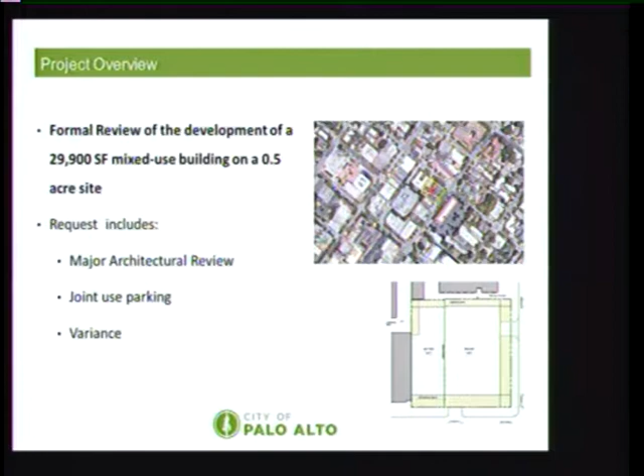The project did go before the board previously in April, just a few months ago. There were a number of items the board wanted the applicant to address and come back with. A lot of those had to do with privacy and daylight for interior spaces, relating to residences along Webster, as well as the interface with the unit and the Redwood Terrace space in the back, which is solely for the use of the office space, and some of the interior layouts on the upper levels for units 15 and 16.

They also wanted to see some bicycle parking added at grade where possible, review the overall height of the building in relation to some of the floor-to-ceiling heights, consider adding an accessible ramp at Webster Street, and finally review some of the lighting throughout the project.

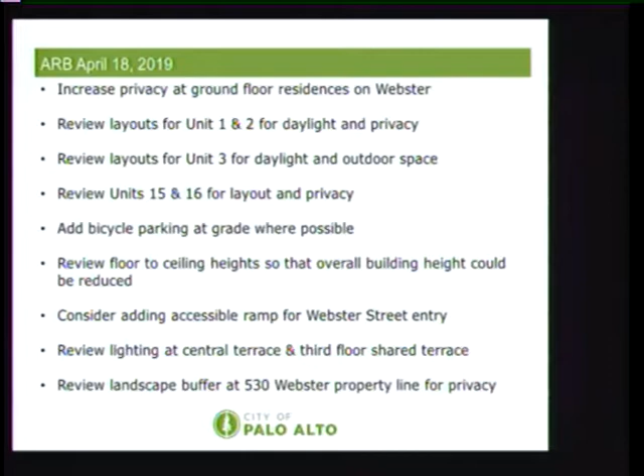The applicant has a pretty extensive presentation on how they addressed each of those issues, but in summary, we believe they've addressed those. There are a couple where, for instance with the height, there are some constraints the applicant has mentioned about the elevator, so maybe we can seek some comments about how to further address that, or maybe it's okay as is. In summary, the project is a 3-story mixed-use project.

There is an offset in the floor area ratio for efficiency of the project, since some of those utility and trash spaces are included more on the bigger, larger parcel with better access to Webster Street, versus trying to get access on Hamilton with a smaller parcel, which isn't really a good idea. So for a better project, there's some offset in the FAR on the site that way.

The project proposes rental units, so it would pay just the impact fee for affordable housing. The project includes a level of basement parking and a lot of those mechanical lift-type spaces, which are allowed by code. The code requires 60 spaces; the project provides 55, but with the project's joint use parking request and their accompanying transit demand management plan, we believe the reduction is okay.

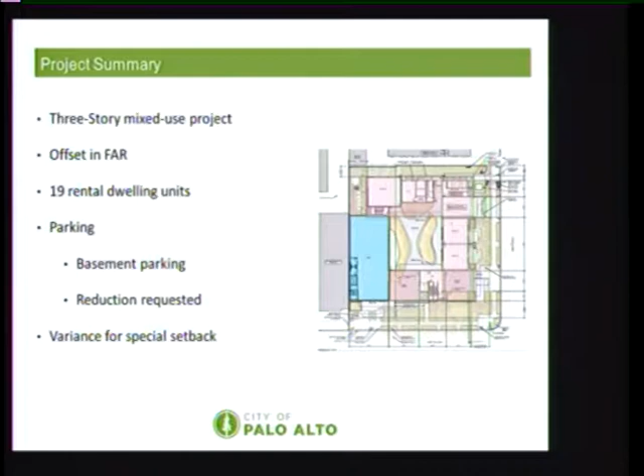This diagram shows the FAR distribution I mentioned previously, and those shaded areas are the utility and trash rooms, accommodating both the office and retail on that space, which makes sense given direct access to Webster. Otherwise, there's a courtyard in the middle of the project for open space, and as I mentioned, there's that terrace area in the back that preserves some on-site mature trees, solely for the use of the office space.

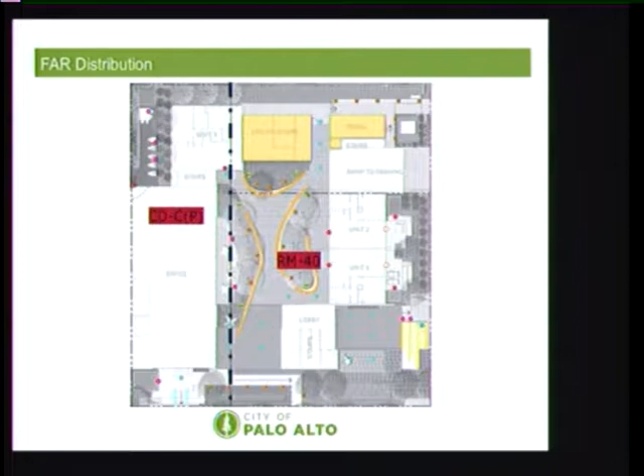There are a couple areas for the variance application. There's a 17-foot special setback along Hamilton, so any protrusion there would require a variance of some kind. In this case, we believe these are warranted—they're canopies, as well as a fin wall designed to be detachable if the city needs to use the space within that special setback area. The canopy, of course, is above ground. So we believe this variance is warranted, given the restrictions in the area.

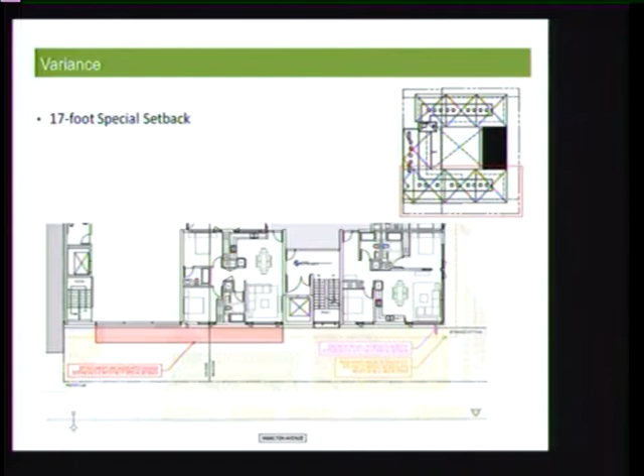And then this just provides a cross-section of the project and some of the floor plates that we were trying to describe. They are a bit generous, but I think the idea is to have a clean aesthetic for the roof line, as well as there's some limitations with the elevator that was chosen. It does have a low profile amongst other types of elevators, but again, the applicant can describe that.

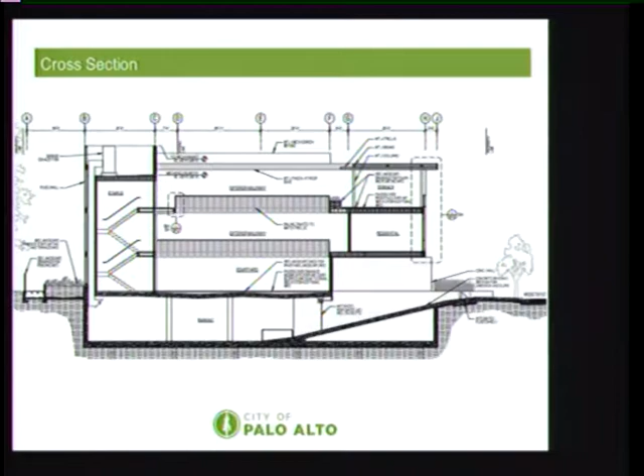And I'll show one rendering here. This is along Webster and the changes that were proposed. They did add a little more landscaping there to have more privacy. So the rendering above is the previous version that was shown in April, and then below is the new one.

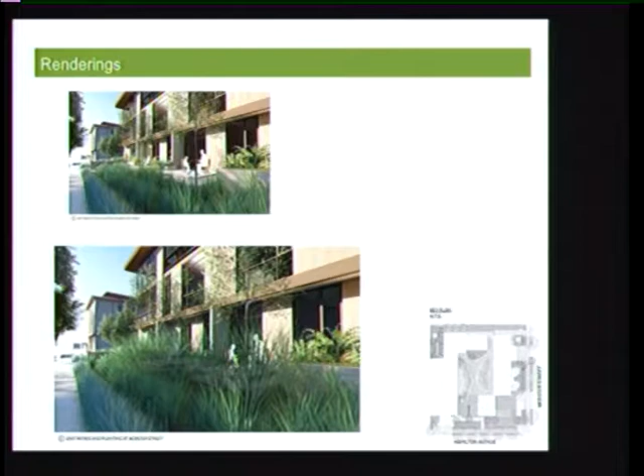So in conclusion, the project does respond to the ARB's comments, and the variance request is acceptable. These revisions proposed and implemented increase the consistency with the required findings. So with that, we do recommend approval of the proposed project to the director, based on the findings and subject to the conditions of approval. And that concludes my presentation.

The first item is the suggestion that we increase the privacy to the ground floor residences at Webster Street. And so we have looked at this carefully. The image that you see up here is different from the one in your package. It was very hard for us to actually render it. Within the rendering we had, it got very muddy in the background. So we thought it better to start fresh with an image that would show you more of what it would look like.

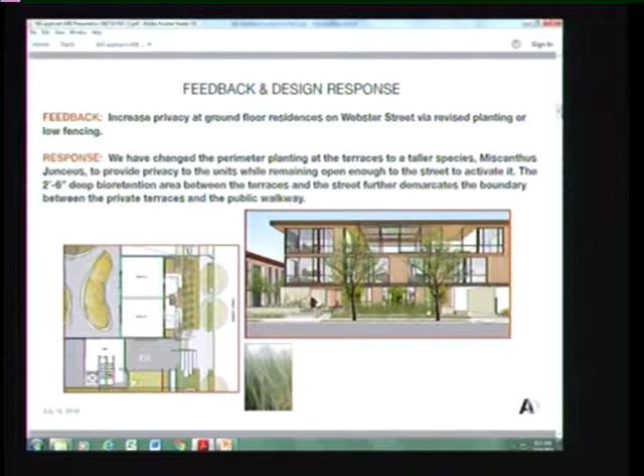And so what we're doing is we're proposing a revised planting, which would provide a greater height and privacy for those residences, while still providing an openness. As you might recall, we started this project a year or so ago, providing fences along those units to provide privacy. And at your suggestion, we pulled them away to really provide a more urban context. I think we went a little too far by making it too low in the last go-around. We feel like we've achieved a balance here that allows for the privacy for the unit as well as the openness that we would like to keep.

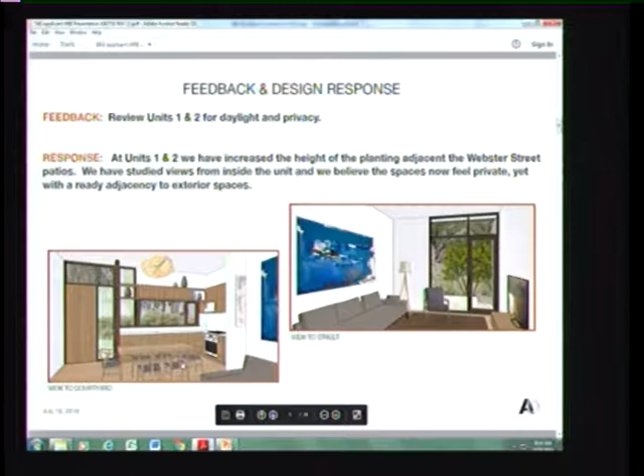One of your other items that you suggested we look at relates to this. So this is looking at those 2 units for the daylight and privacy from within the space. We have provided some images of what that looks like when you're looking from the living room out to that terrace area and then back to the courtyard. We recognize that there are very different people who look for very different things in the apartments they choose, and we think that these are apartments that would be very applicable for the urban dweller who wants a direct connection to the outside and more of a direct connection to the street. But that said, we have provided translucent glazing at the door as well as shades at the windows for privacy should that be desired, and that is typical in all the units.

For Unit 3, which is the corner unit by the Redwood Garden, we have also shown you here the atypical kitchen casework elevation. I think there was a comment on how the casework and the window might work together. So we've designed the casework to sit above the window at this location, which provides space for a shade pocket to provide a direct connection to the exterior. At this unit, the kitchen has a landscape buffer of 6 to 7 feet before the terrace starts. That landscape buffer provides a distance and some height of planting, and there's also 2 magnolia trees there to allow for a little more privacy for that unit.

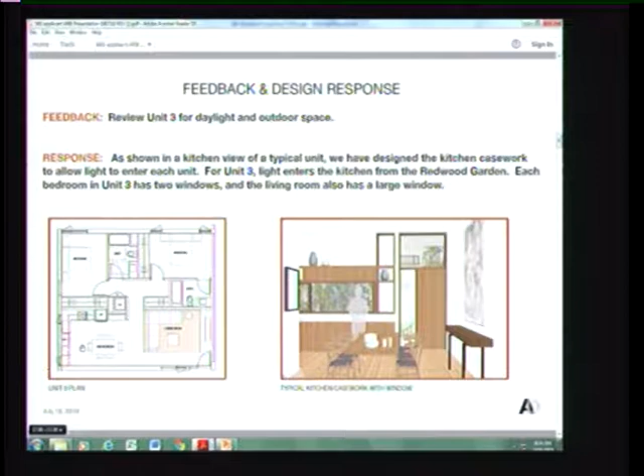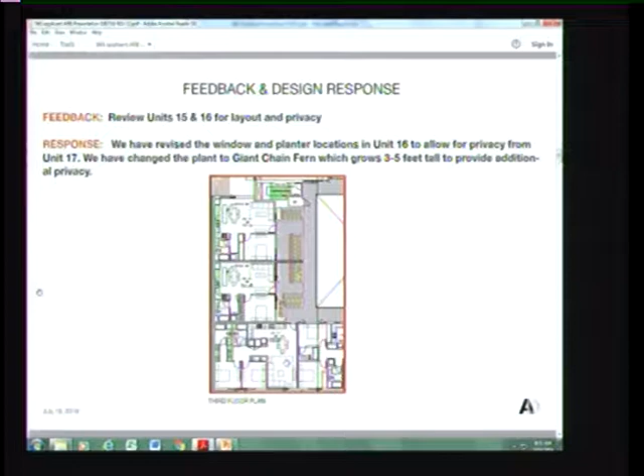For units 16 and 15, we thought it was really helpful to relook at this in terms of privacy. We have relocated the window for unit 16 and reoriented the planters to provide more privacy between unit 16 and 17. In addition, we've changed the landscape material to a giant chain fern, which will grow 3 to 5 feet to provide additional privacy between those terraces and the walkway.

We have taken your suggestion to add more bike parking at grade by adding 2 more spaces at the corner entry. This brings our bike parking count and short-term bike parking count up to 6 from 4, and 4 is our required minimum.

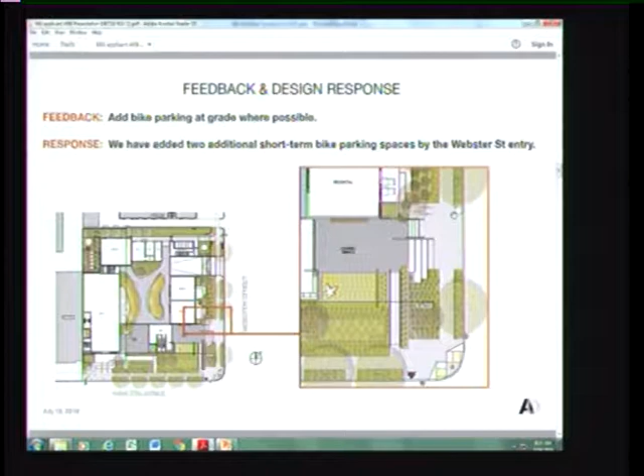I'd like to spend a little more time on this one, so I'm trying to rush through some of the others, because looking at the height was something that we did very carefully, and it's a bit of a complicated issue.

We're happy to give you a couple more minutes if you need it, to make it clear to us what you're doing. All right, I'll slow down.

There are a couple of driving factors in setting the building height at 40 feet. The first is that our first floor is set by being 1 foot above the base flood elevation. We then have 2 elevators within the building, each with their overruns, and that sets the height of the 3rd floor, with the 3rd floor being the residential unit, and the 2nd floor where the office elevator comes up.

What we're specifying is a Schindler elevator, which has a 12 foot 7 inch overrun, the lowest we've been able to find. Most are in the 13.2 to 14.5 foot height range. Even with these, we're not bringing our typical floor plate over. We're having a very special acoustical separation at that location, where we have a residential unit.

At our roof, we're popping up just a little bit, but still where you're not able to see it from the street. The last floor, basically in this sandwich, is our first floor, which right now has a clear space of 10 feet 4 inches in the office, before the mechanical ductwork.

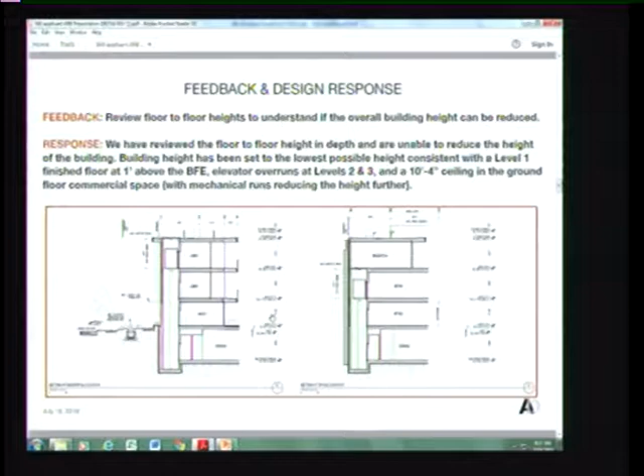We've also taken a step back and looked at the project. We haven't looked at these images for a while. They're in your package, but they haven't been part of your presentation. Just to look at this building in the context of its neighbors.

It is truly, as Sheldon has said, a transition building. It transitions from these taller buildings. All of its neighbors are taller than it. Obviously the church is 70 feet, but our adjacent neighbors and then the neighbor across Hamilton are taller too, and then we have our lower residential neighbors.

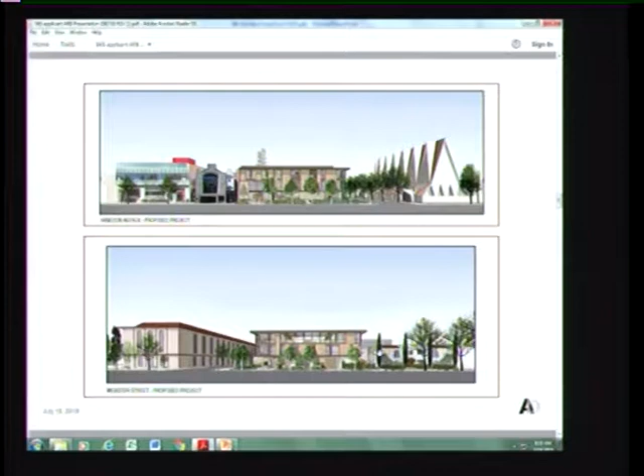We're addressing that by opening the building at the top floor, creating a glazed corner, and bringing that third floor line to align with the roof line of that building. So we feel that the building, with its 40-foot height, still really deals with the transition at this corner.

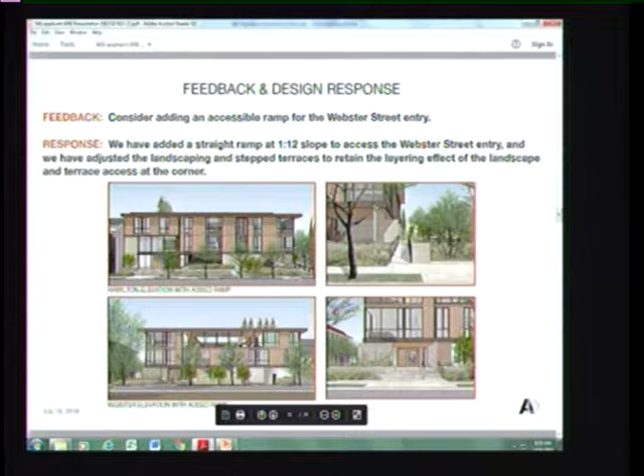You had suggested that we look at adding an accessible ramp to the Webster Street entry, and we think this is a very good suggestion. We have added this in as a straight ramp, a 1 in 12 ramp, by adding another planter and layering it in, so we still have the cascading steps that come to that corner. We think this is an improvement to this corner for many reasons, accessibility being the primary one.

Here you asked us to look at the central terrace and the light levels. We think this space is going to be quite nice. It's 30 feet by 32 feet, and we have two analogous spaces that we'd like to show you.

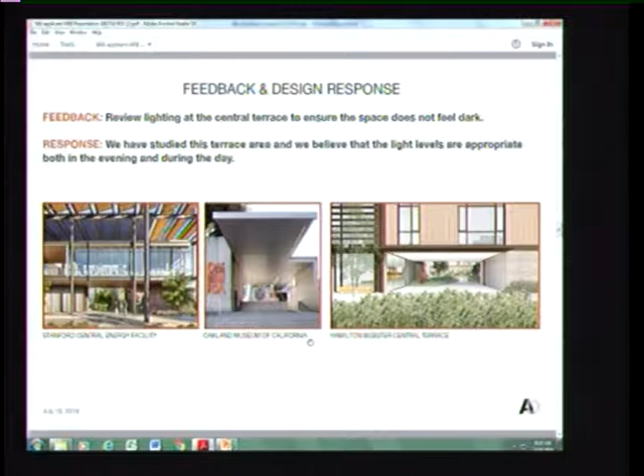Here is the Stanford Central Energy Facility, and that space is scaled very similarly. You see the courtyard through the center of the space. Then the Oakland Museum at its front entry canopy, which is much longer, but daylight appears along the side and then in the back in a similar proportion for the space here. I think both show that the space can feel light and not dark.

At the third floor, we looked at the lighting and thought that was actually very helpful. We went back and found a new fixture, and this fixture has brought down the lighting level significantly, but it still provides an even level. We haven't changed the number of fixtures, so the lighting level is even.

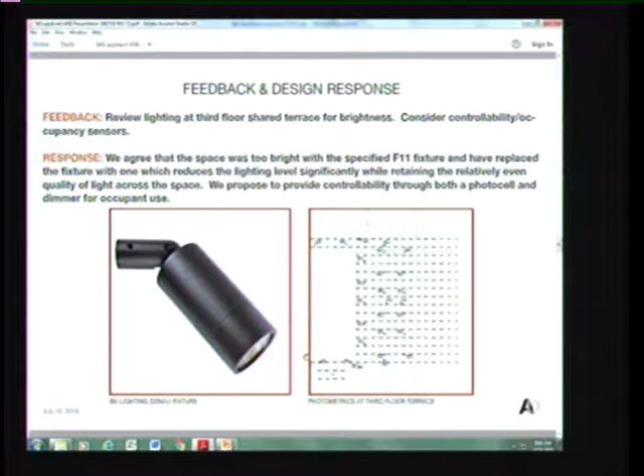In looking at controllability, we're proposing to provide that through both a photo cell and the ability to have a dimmer for occupant use. The intention is to keep it low, and if an occupant needs to use it higher, it would be set higher. We were concerned about the on-off occupancy sensor and the kind of flickering through time.

We have also looked at the landscape buffer to our north, and after meeting with our neighbor, we've added 2 additional trees along this boundary property. We have a utility line running into our utility space here, so we're unable to add more trees along this area. But the coffeeberry shrub proposed here can grow up to 15 feet.

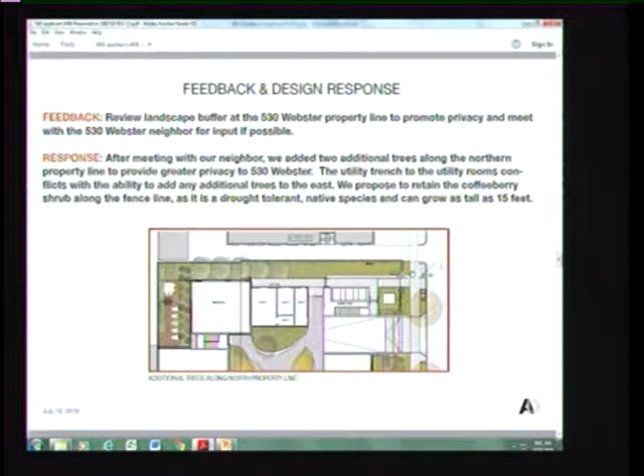There are a couple of planning requested changes, as Sheldon has mentioned. We now have updated things to show how we meet the new ordinance between lowering the stall count from 67 to 60, and then increasing the open area.

The increase for the RM40 parcels increased from 1,300 to 1,950 square feet. But it's important to note that we have 2.5 times that amount for this project, so we're well within that.

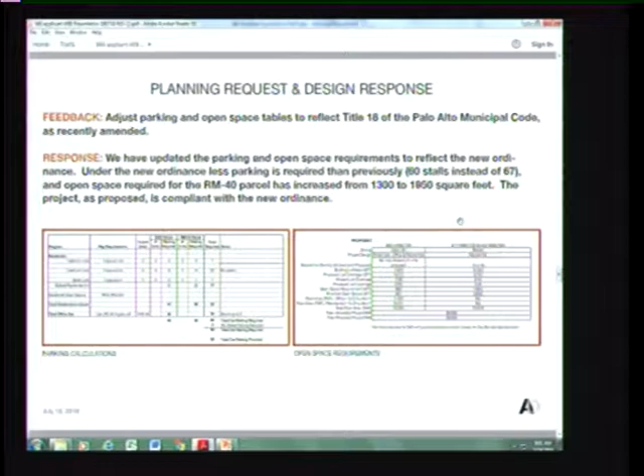And then lastly, we have pulled the building back a foot from the property line. Originally, the building itself sat at the property line, with window projections and eaves moving into that to provide depth for the building. So we've worked with planning. We feel like that depth is really important to the facade.

So we have taken a foot out of the courtyard and a couple of inches out of the units to pull the building back and allow those windows to no longer be in the setback.

We have also worked very closely with planning to allow the fin to extend, but it basically has separate rebar cages and can be cut off if needed in the future and still be structurally sound. So the remaining images are just the elevations.

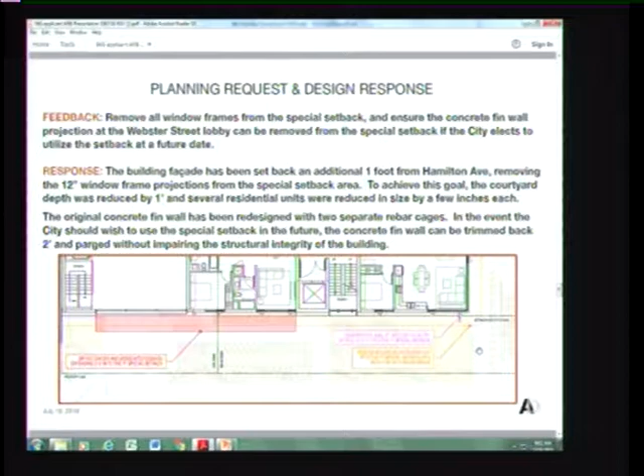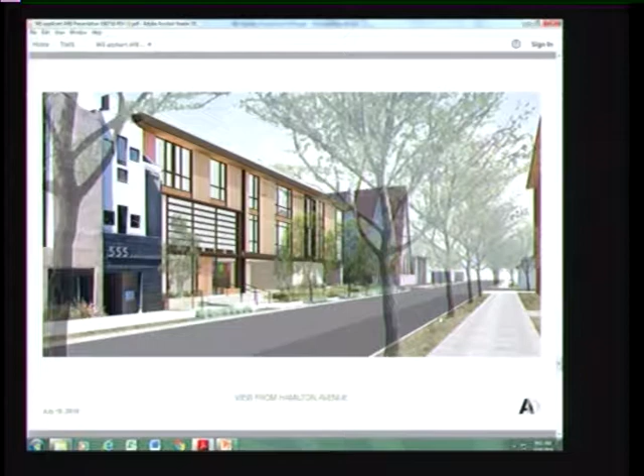And with that, we look forward to hearing your comments.

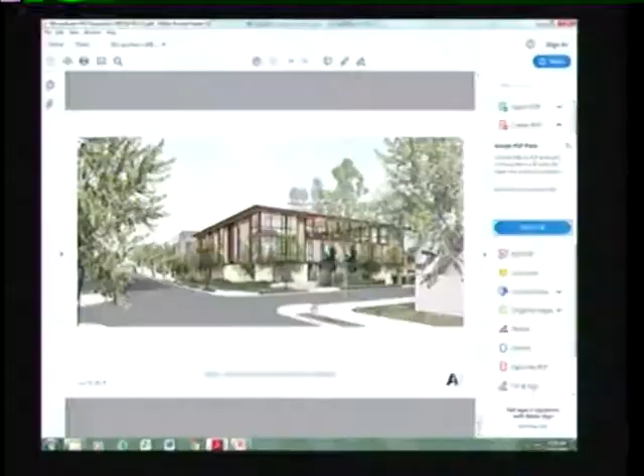Well, hold on a second. If you look at this image here and look at the right-hand side of the building compared to 530 Webster—this one? Yeah, Alex is holding up the actual architect's rendering from the corner of 530 Webster. But if you also look at this one that's on the screen now, very small, you can see 530 Webster in the background, and I think you can see that this building is substantially larger than 530 Webster. Visually, it really seems to overpower that building. And that building in particular, to me, has a real sense of presence on the street, a real character to it. And I think the building next to it is just a little bit too big.

And then when I hear the reason it's a little bit too big, it's really to do with the technical thing about elevators. It strikes me that it is possible to configure it so the elevator overrun goes through the roof and you have a bump out somehow. I would rather see a small bump out on the roof with the roof plate being lower than I would see the entire building be substantially taller.

So to me, it seems that the building should come down maybe a foot on each of the two residential floors, and we can ask the architect to revise the way the elevator overrun on the roof works through the roof. Then on the third floor, you have to find a way for your residential unit to accommodate that overrun somehow, if you can't find a different elevator. But to me, the building is just too tall vis-a-vis its relation to 530 Webster, and that is very much our province to solve.

So I'd like to see us request that building get pushed down. I think we can still recommend approval with that condition.

I can support the variance findings. I think it makes good sense, and the design itself is wonderful, I think. Thank you.

Thank you. So thank you to the applicant for an interesting, attractive project and for really clear documentation, which has perhaps made us more focused in our critique than we might be with less clear work. It's both been an advantage and disadvantage for you, but we think it's an advantage because we think the truth will set us free eventually.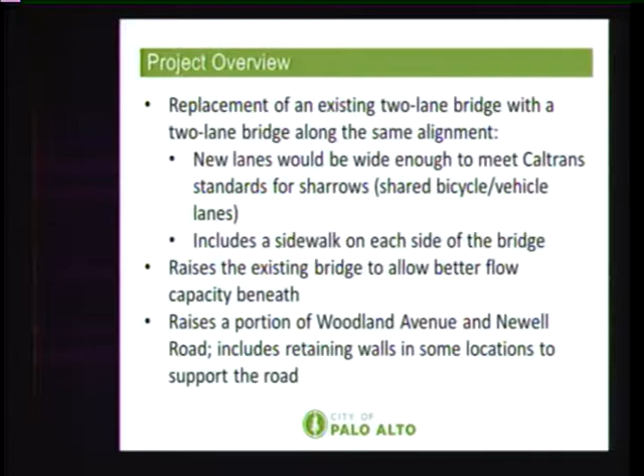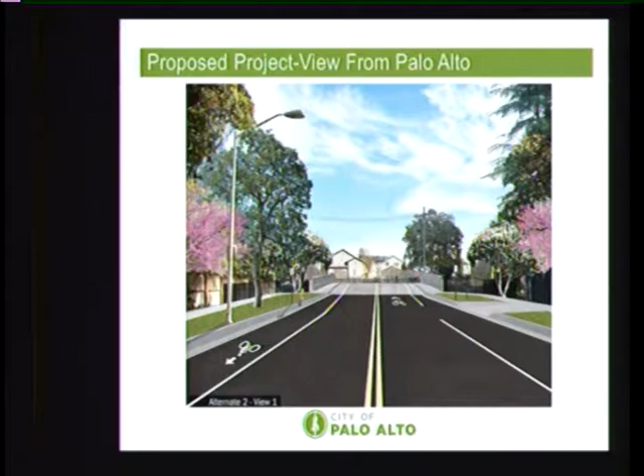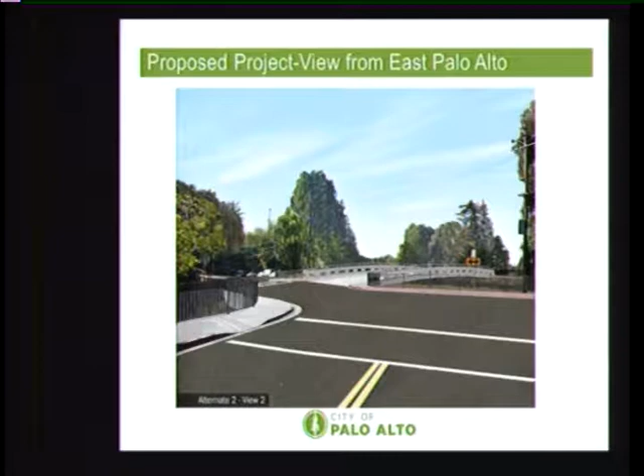So this is just a quick view of Newell Road, of the bridge from Newell Road in Palo Alto. And this is a view of the proposed bridge from East Palo Alto on Newell Road, again looking over Woodland Avenue.

Part of the purpose of this meeting is to provide another opportunity for public comment on this project. The circulation period for the draft EIR/EA is ongoing right now and ends on July 30th. This is the 4th and final public hearing during that review period. But we're also here to request that the ARB provide comments on the design of the proposed project. So any thoughts you guys have on the bridge, the railings, the retaining walls, the landscaping in particular would be very helpful.

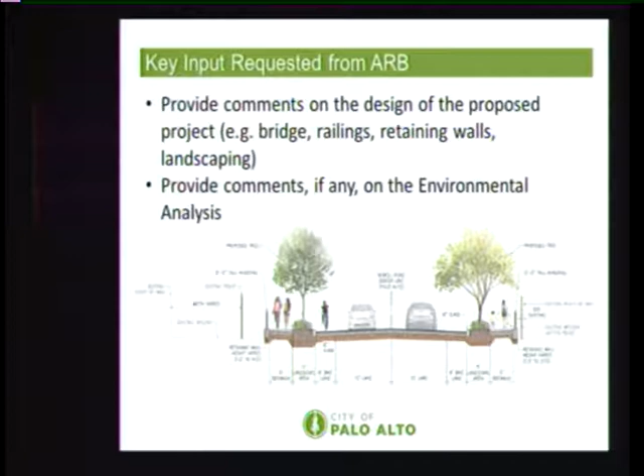And then any comments you may have on the draft EIR/EA are also welcome. And I also want to note that to the extent that you have comments relating to the NEPA component of the project, Caltrans is here today to answer any questions as the lead agency for NEPA.

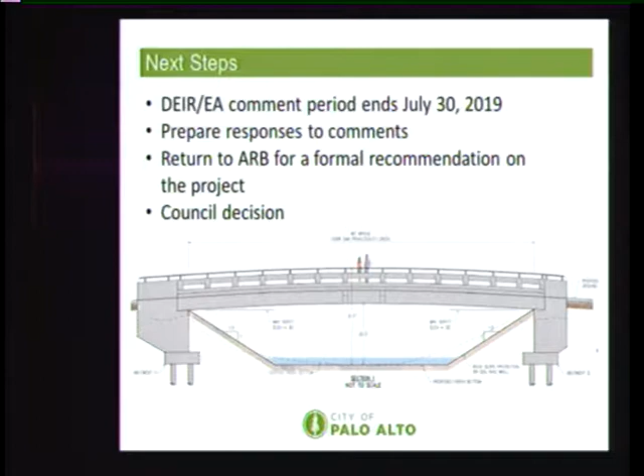So in terms of next steps, the draft EIR/EA comment period ends on July 30th, and then we'll prepare responses to all of those comments, and we'll be returning to the ARB for a formal recommendation on the project, and then going to council for a council decision. And with that, I will turn it back to you and recommend that you hear from Public Works.

Thank you, I had one question. So the other responsible agencies in this case are? There are several other responsible agencies. City of East Palo Alto is a responsible agency. Santa Clara Valley Water District is a responsible agency. Regional Water Quality Control Board would be a responsible agency. So there are a number of different responsible agencies.

So this is like landing on an aircraft carrier. Okay, yeah, there are quite a few permits.

And you said this is the fourth public hearing. What have the other hearings on the environmental review been before? There was a Planning and Transportation Commission hearing on, let's see, what date was it? June 12th. And then we had a community informational meeting on June 18th. And what was the next one?

Sorry, hi, Michel Jeremias, City of Palo Alto, Department of Public Works. I'm a senior engineer working on this project. The third meeting was scheduled for June 19th, and it was a Public Works Transportation Commission meeting in East Palo Alto. We also gave a brief presentation at the Joint Powers Authority, San Francisquito Creek Joint Powers Authority Board, and we've had a separate community meeting for the City Council of East Palo Alto that was done earlier in the week on July 16th. Thank you.

So first to my fellow board members, has everybody seen the site? Yes? Yes, I have not, no, but I looked at it digitally. Everybody but Board Member Thompson's been able to be there in person. And does anybody have any conversations they wish to disclose before we hear from this?

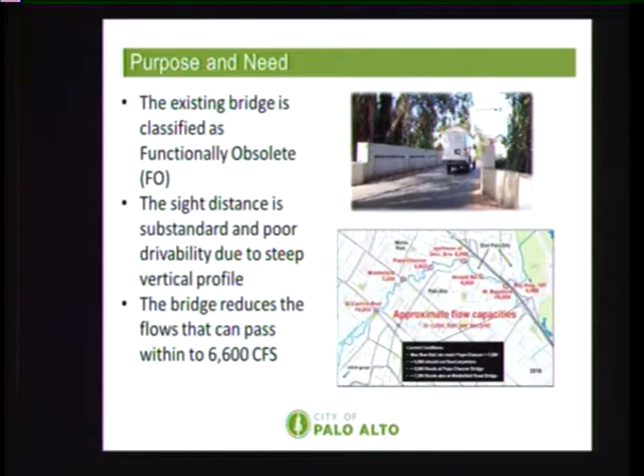So there's an urgent need to replace this project so that we can proceed with the upstream project, and it would benefit the community by reducing the flooding risk that affects our neighborhoods.

Project objectives. So as we have described our need, we also tried to identify what the objectives are and how we identify which options to consider for the EIR. Several items were considered. The first was vehicles maintaining a connection between both jurisdictions, allowing not only vehicles to pass through but creating sidewalks and providing for multimodal use. In line with that, we looked into not increasing traffic in either direction, and not increasing speeds. So those are items that were considered.

The project before you takes into account that it should not increase speeds or traffic, or divert traffic to other intersections. We've also looked at increasing the capacity of this bridge to something in line with the upstream project, and also based on the largest storm of record, which is the 1998 storm. So we're proposing to bring this up to about 7,500 CFS.

That's the capacity of the creek as well. So if you eliminate any constraints in the creek, that is how much flow could get carried through this creek from upstream all the way out to the bay. Recent improvements downstream have also allowed us to increase these capacities. As you're aware, there's a project that took place to widen the levees.

With these purposes and needs, and the objectives, we were able to narrow down—following several community meetings that have occurred over the last 7 years—to identify 5 alternatives. The fifth alternative, not shown here, is to leave the bridge in place. But the alternatives that were considered, in my next slides, I will show you a depiction of what these entail.

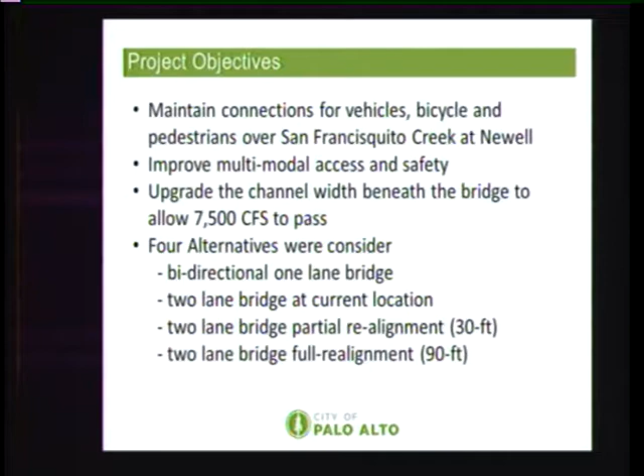Alternative 1, a little more detail for you to look at. This depiction shows what alternative 1 would include. Alternative 1 is a bidirectional bridge, only 16 feet wide. It provides 5-foot wide sidewalks that would accommodate multimodal use for pedestrians. But in order to accommodate 16-foot traffic in 2 directions, we need to install traffic signals.

There would be long-term operation and maintenance costs associated with this alternative for the fiber and power needed to run the traffic signals. The area of disturbance, for purposes of comparison, is 45,000 square feet.

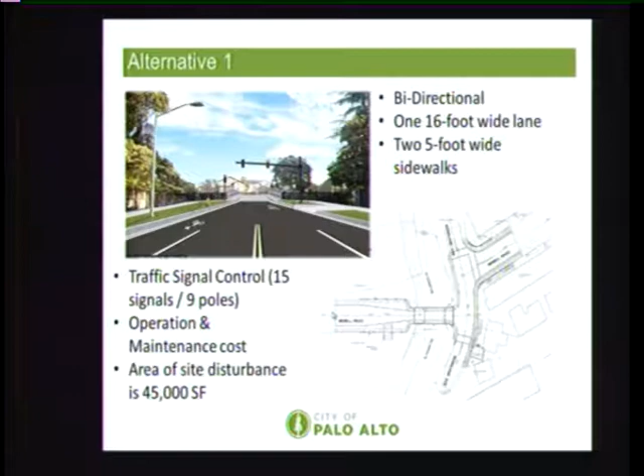In this alternative, I want to note that the bike lane would terminate at the end of the driveway approach. We would then stripe, within those 14-foot wide lanes, a shoulder line 4 feet off from the curb, creating a 10-foot travel lane. The shoulder line would act as a bike lane.

We've had a number of comments through the ongoing meetings regarding adding measures, so this is a bit of a change. We've added more information on these slides to show that the travel lanes in both directions are still maintained as 14 feet wide, but 4 feet of those would be shoulders that could be used for cyclists.

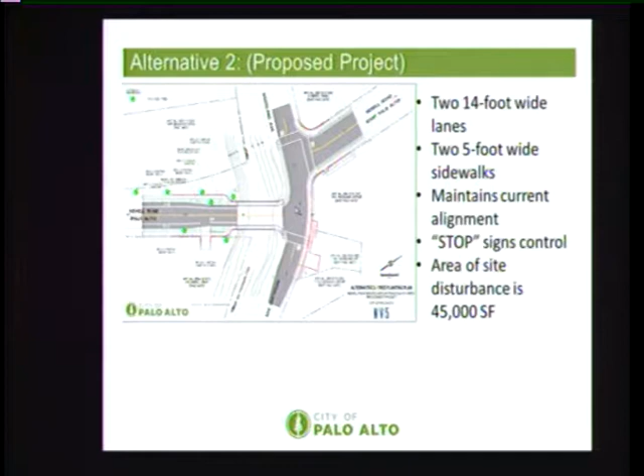Another thing to note, as Claire stated, we are raising this bridge by 1.5 feet, which also requires raising the approaches on both sides, on the Palo Alto side and the East Palo Alto side, by a total of 4 feet. That would reduce the vertical profile that currently creates a problem for people driving over the bridge.

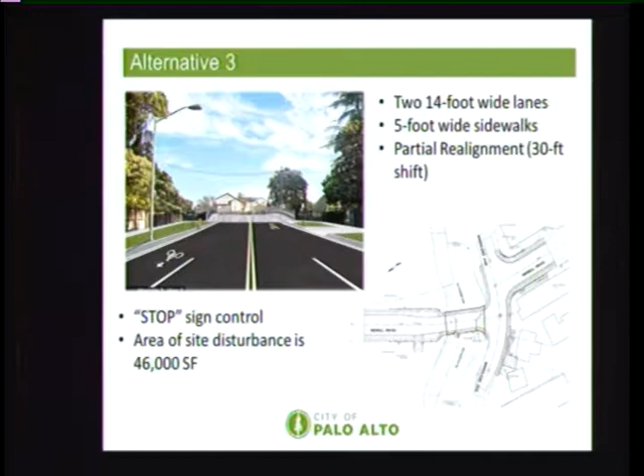Alternative 4 is a full realignment. Similar to the previous alternatives, we're looking at 2 14-foot wide lanes, 2 5-foot wide sidewalks with a full realignment. The area of disturbance is higher, 55,000 square feet. As part of the EIR, it analyzed things we would have to mitigate at a later date.

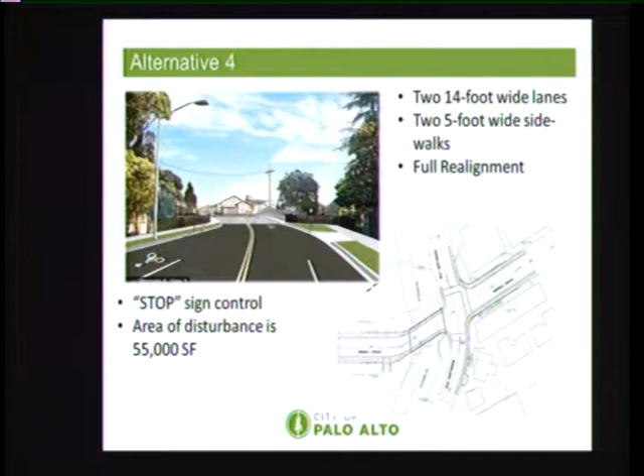Several trees to be removed as part of this alignment would also be located on the East Palo Alto side.

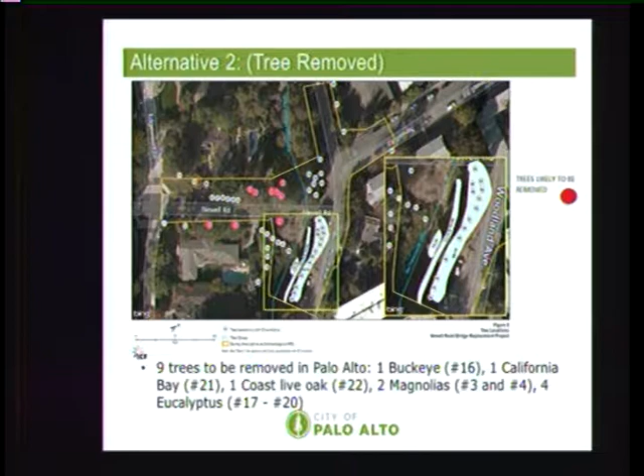For the proposed project, we've made a few changes over the course of our presentations. We have an existing street light in place that would need to be replaced because we are lifting the road. The proposed retaining walls needed would be located behind the sidewalk, so they won't be visible from the public, but for the most part they would be visible on the East Palo Alto side by residents of those areas.

On our side, we would intend to also provide some screening. This area does not create line of sight concerns. The concern with line of sight is located on Newell and Woodland. That's the area we try to avoid while adding more trees.

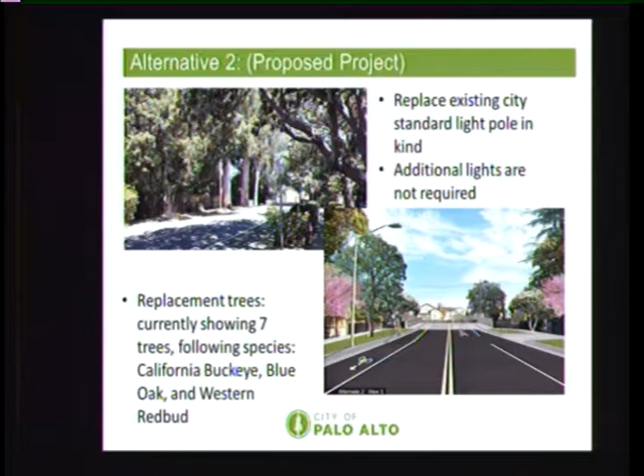We're proposing right now to provide a California buckeye, a blue oak, and a western redbud in this area. If you have opinions on what we would want to replace, please provide us any comments and let us know. I thought there was a need to replace another buckeye, so we're providing 2 buckeyes in this location.

For the proposed project, we also talked about the concrete retaining walls. As stated, they're located behind the sidewalk. This area shows where the retaining walls are shown in red. The retaining walls on the Palo Alto side would again be located behind the sidewalk as we're raising the road. The location of the trees are shown in green in this proximity. I apologize, this isn't a landscape plan, it's an engineering plan with a few details added to depict where the trees would be located.

We also would look at guardrails to be installed. Guardrails are required per the CBC where the separation between the adjacent grade is 30 inches or higher, so we would try to provide those. For the purposes of the project, we're assuming retaining walls would be needed along this stretch, about 100 linear feet. We probably wouldn't need guardrails the entire stretch - as we conform to the existing grade, the guardrails would be eliminated.

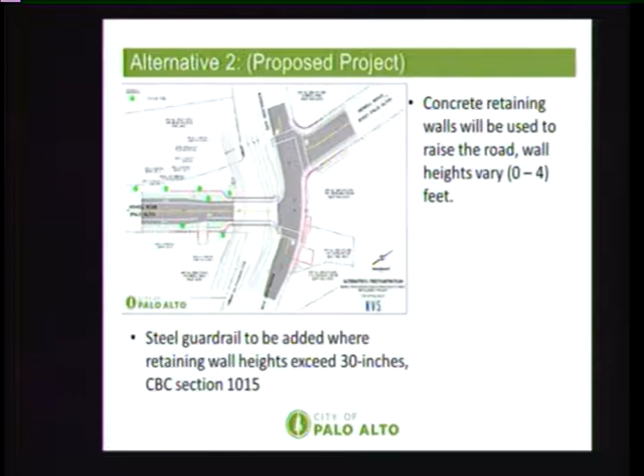A little more detail as far as the bridge itself. This project is funded by Caltrans, and they are reviewing it. We've got to comply with Caltrans requirements. Their standard for the bridge barrier is a Type 80 SW for the sidewalk width on this.

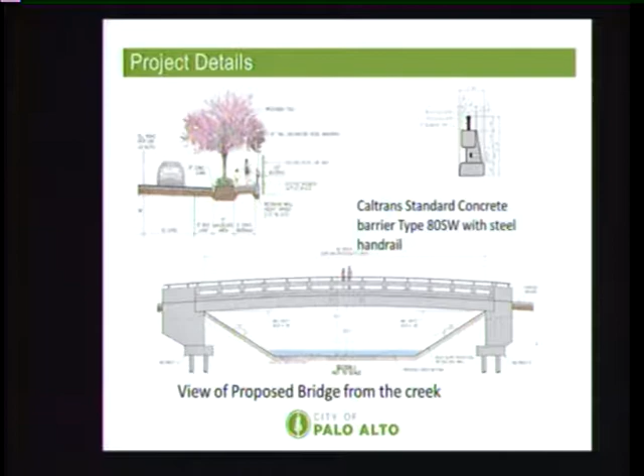And this would allow us to improve the line of sight concerns that we have. Other areas we're looking at on the Palo Alto side show where the guardrails would be installed. The guardrail would be located at the retaining walls, in any areas that are taller than 30 inches.

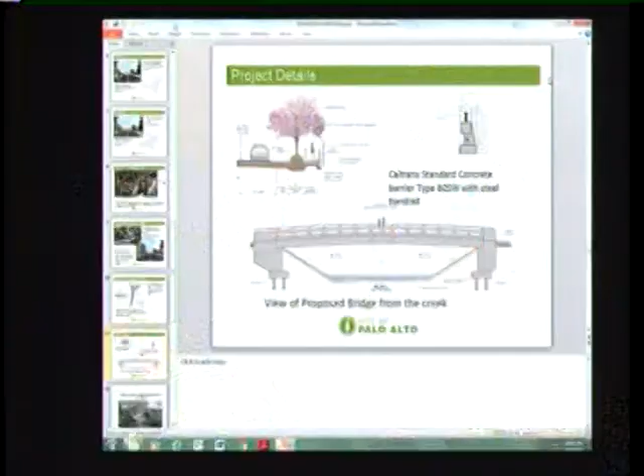It's measured at 3 inches. I don't see that in the elevation. What is that? So that little black box is another steel piece, still part of the bridge itself, the guardrail. It's a steel metal barrier that goes across the intersection.

One of the things we have to comply with in this project, as you stated, there's a lot of difficulties involved and a lot of things that need to be measured out. In this circumstance, we need to meet Caltrans MASH test, meaning that if there's an accident and anyone hits the guardrail, this will prevent the guardrail from falling. It has to comply. This is one of the guardrails that has passed that MASH test.

So we're installing a guardrail, a barrier that meets Caltrans standards. That small square is part of their standard barrier. It's small, square, and made of steel.

So it's the steel bar that goes across the whole thing, and it's not being shown in the elevation. Right, I think it has been inadvertently omitted on the elevation right below. Got it. Thank you. Any other questions?